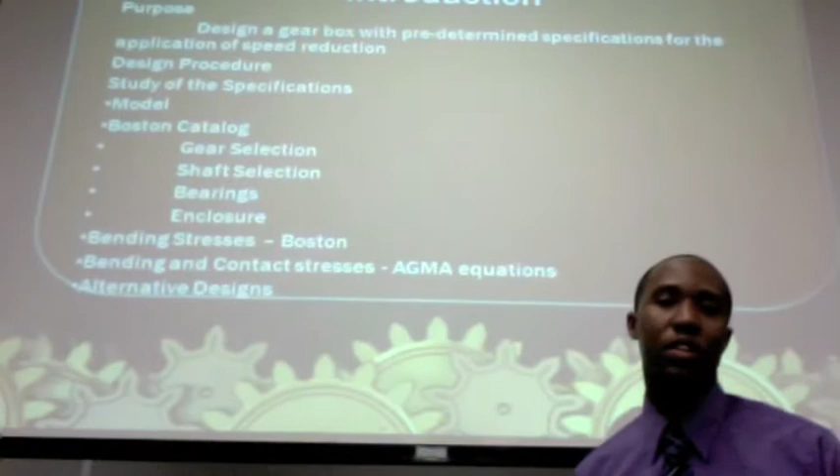Our purpose was to design a gearbox with some predetermined specifications for gear speed reduction. We started off our design procedure by first looking over the specifications, designing a model, then going to the Boston Gear catalog and picking out gears, then designing our shafts, our bearings, then the enclosure. We did bending stress in the Boston catalog and compared it to the AGMA equations, and then after that we went over alternative designs.

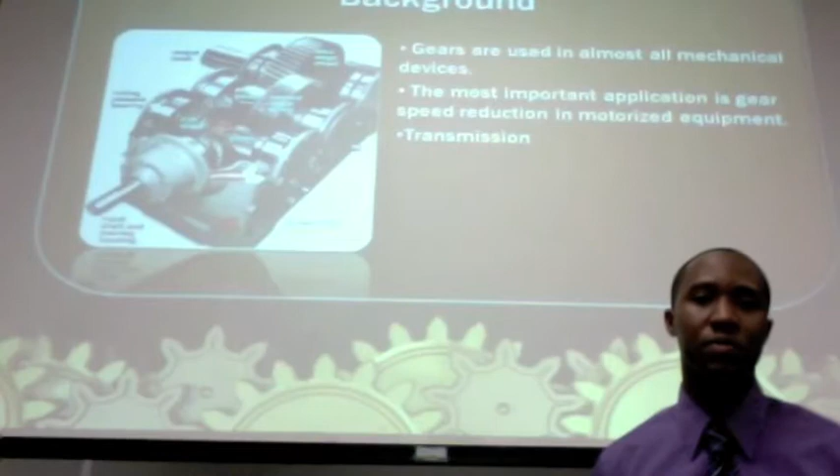Gears are used mostly on transmissions and are used for reducing the speed and also increasing the torque.

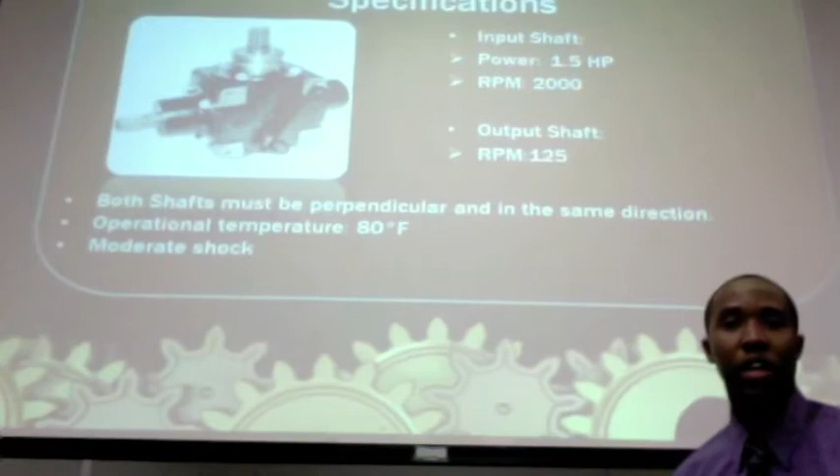The specifications for our project were to have the input shaft at 1.5 horsepower, 2,000 RPM, and the output at 125 RPM. Also, the shafts had to be perpendicular and rotate in the same direction. Our operating temperature was 80 degrees Fahrenheit and had moderate shock.

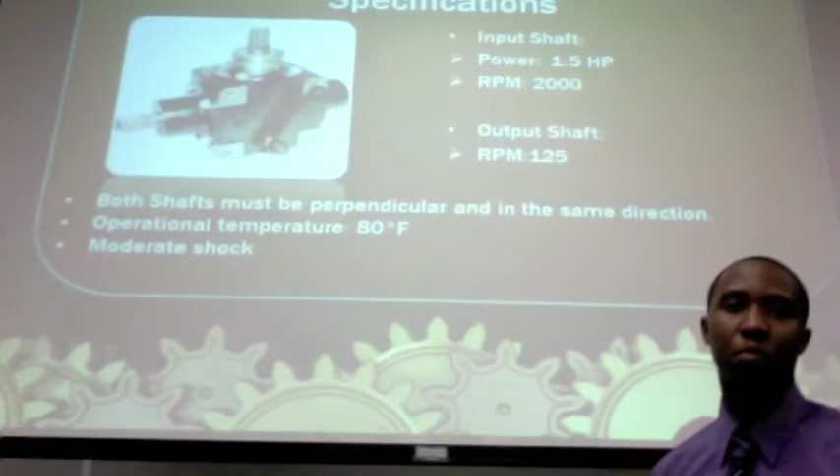Now I'm going to pass it on to Corey, where he will talk about the gear design.

I'm going to talk to you guys a little bit about our gear design and how we started to develop our transmission. So we started off with the gears itself. One of our main factors within our design was we had to have perpendicular input and output shafts. So by knowing this, we know that we had to have a set of bevel gears in our transmission.

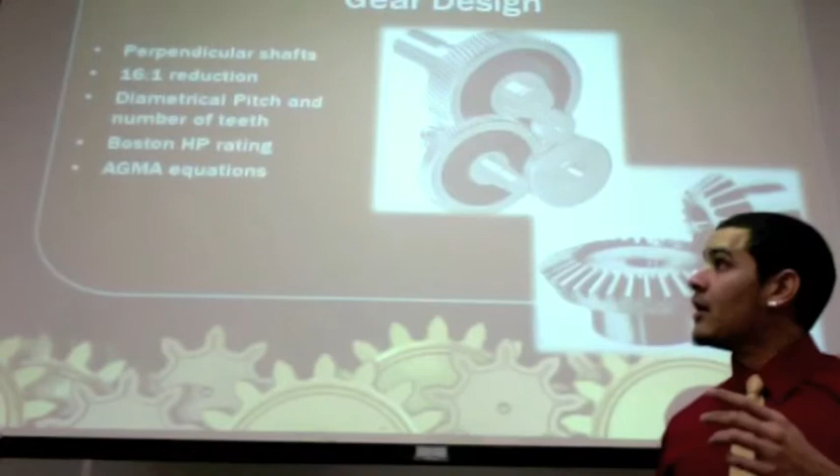By knowing that, we figured out our overall reduction of 16:1 and decided to start with a simple transmission of 2 sets of gears. So each stage would have a 4:1 reduction, giving us our overall of 16:1 reduction.

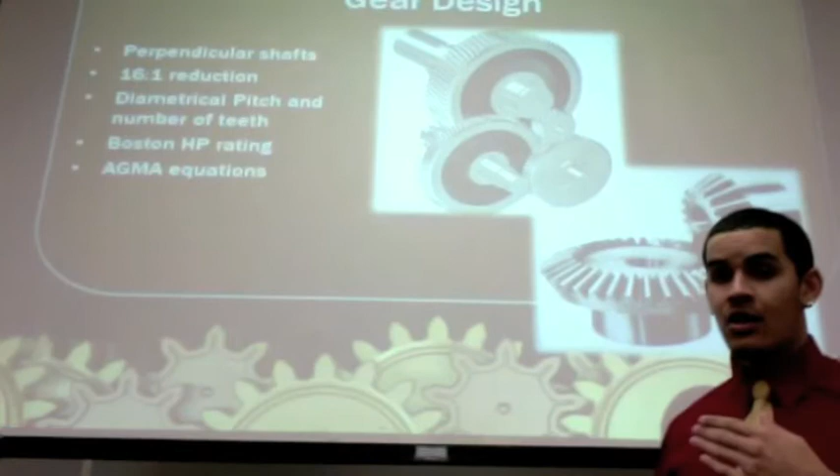From here, we figured out our geometry and how we're going to lay out our transmission. And from here, we could figure out a diametrical pitch, number of teeth. And once we had all those numbers, we could then go to the catalogs and pick our specific gears.

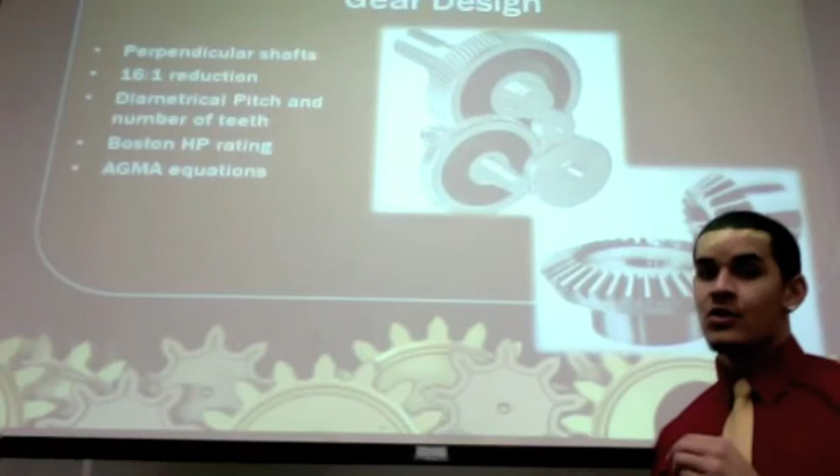So we decided to use the Boston Gear catalog. And from here, we chose specific gears that would give us the ratios we needed. Once we had those gears picked, we tested them based on the horsepower ratings that Boston specified. And once we had those done, we compared it to the AGMA equations, and in turn, they turned out to be within our limits.

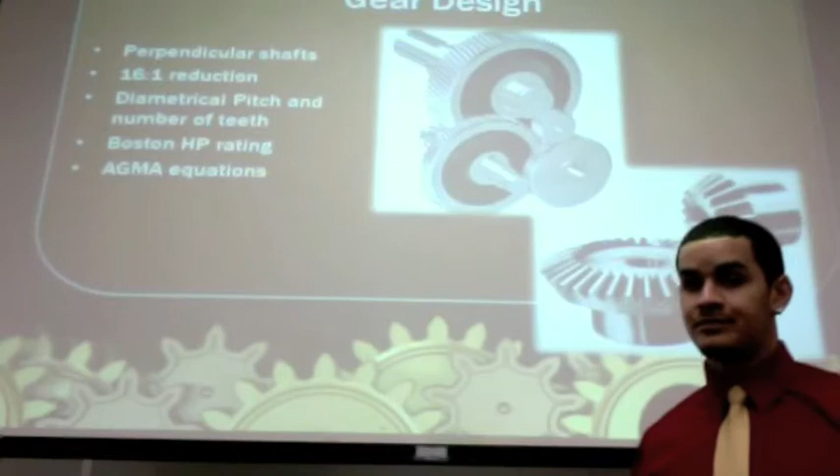From here, we went on to our shaft design. Picking our shafts, we had a fixed diameter because the diameter of the gears itself was fixed, so the only main variable we had for our shafts was the material. We decided to start off with a very hard steel, which was we actually ended up using stainless steel, 303 stainless steel. And from here, we did a stress analysis on the shafts based on the Goodman criteria.

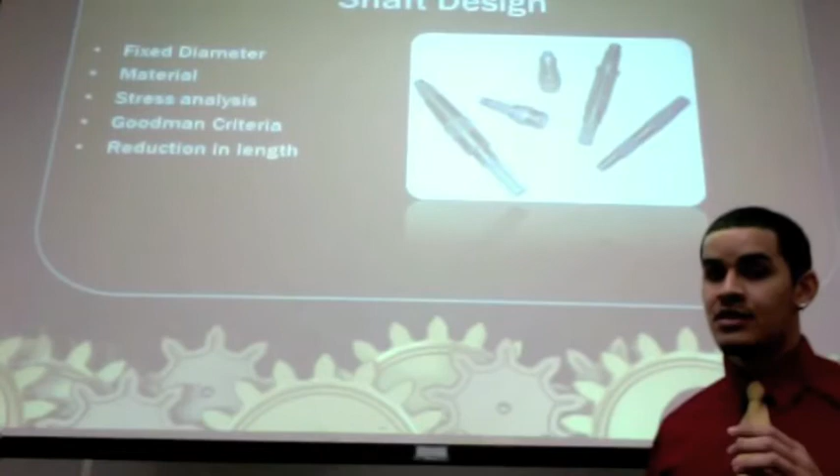After doing this, we realized that during our design process, we could have actually done a reduction in length in some of our shafts, which would actually increase our factor of safety due to smaller moments and torques.

So once we had our shafts and gears done, it was time for the bearings. To pick our bearings, once again, these are based on the fixed diameter of the shafts, so we had to find a bearing that would fit amongst these shafts.

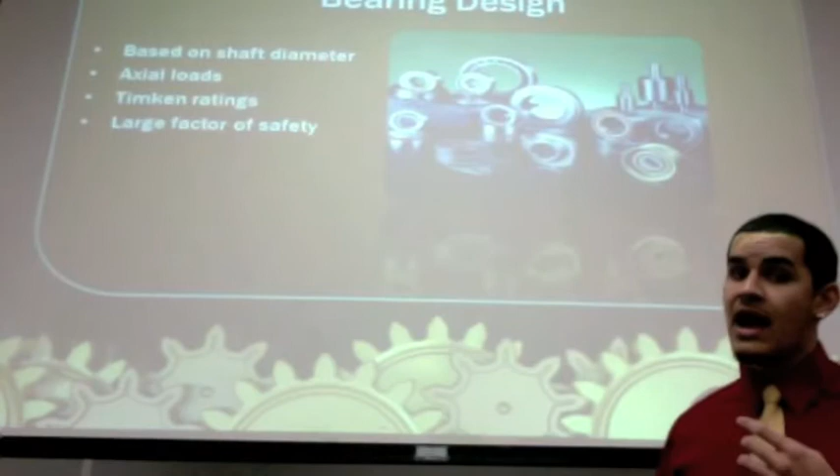So we consulted the Timken catalog, and once we found our specific bearings we needed, we tested them based on their equations, and we actually found that we had a very large factor of safety within our bearings. Even though we had some axial loads, because of the bevel gears, they weren't significant enough for us to have to use tapered bearings.

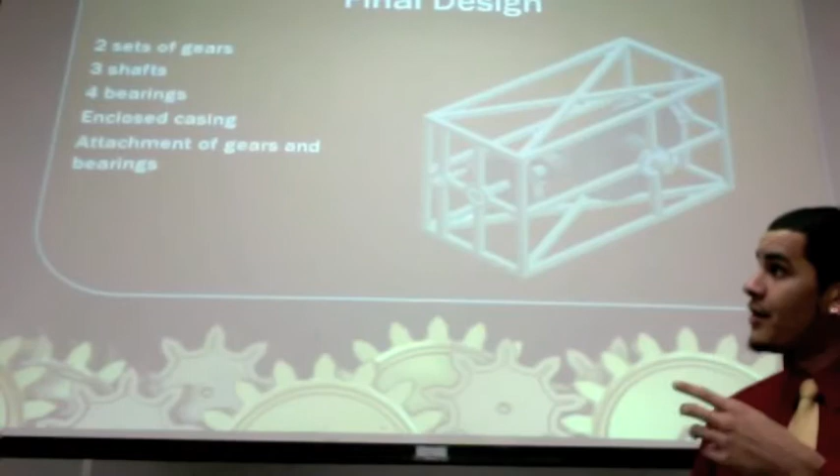So from here, we got our final design, which was based on 2 sets of gears. We had a set of bevel gears, a set of spur gears, and from here we had 3 shafts. Once we had our shafts picked, we figured out we needed 4 bearings, and we figured out that we could have actually made a complete casing around the gears, which would act as support and protection for the system, because one of our factors was high humidity levels.

So by keeping that in mind, we have a sheet metal that enclosed the whole casing in order to get us a fully closed casing so that we wouldn't have to deal with the humidity levels.

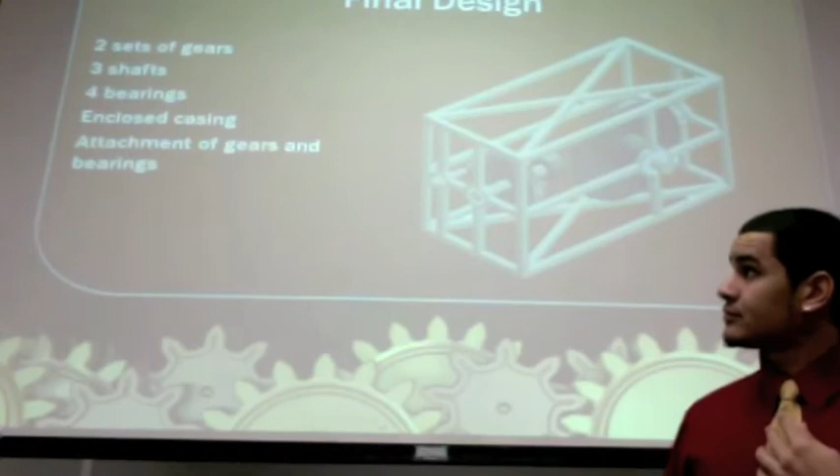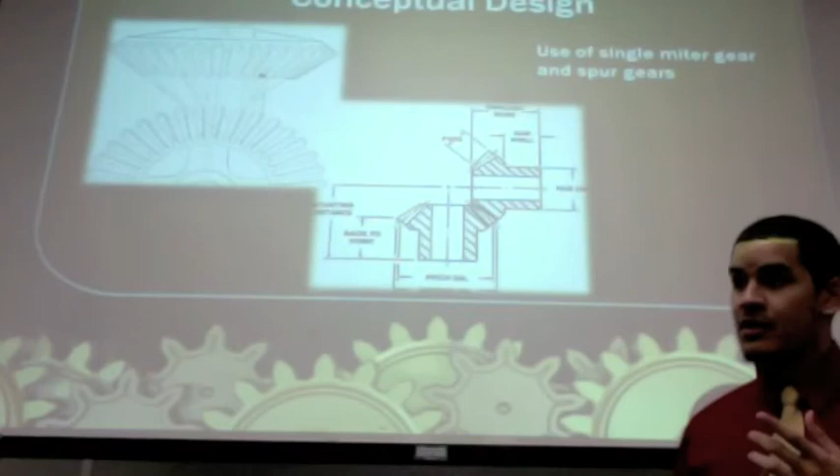During the process of designing our gearbox, we realized that there were a number of different routes we could have taken, one of them being that we could have used a single miter gear, which is a 1-to-1 ratio of bevel gears, to achieve our perpendicular design that we needed, along with a numerous amount of spur gears that we could have chosen. It could have been 5 sets of spur gears, 8 sets of spur gears, however much we wanted. But we decided to go the route of just 2 sets of gears and a 2-stage reduction gearbox.

Hi, my name is Christopher, and I'm going to be talking about the cost estimate and summarizing our results from the presentation. As Corey mentioned before, we had chosen the correct gears, bearings, shafts, and enclosure in order to properly enclose our gearbox design.

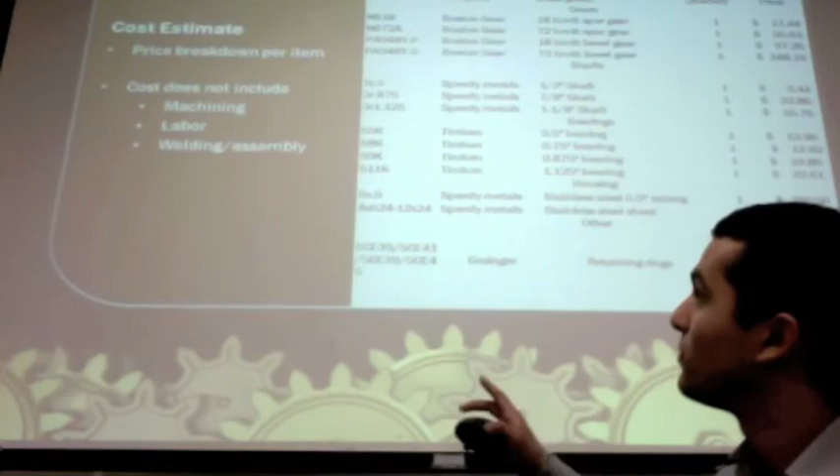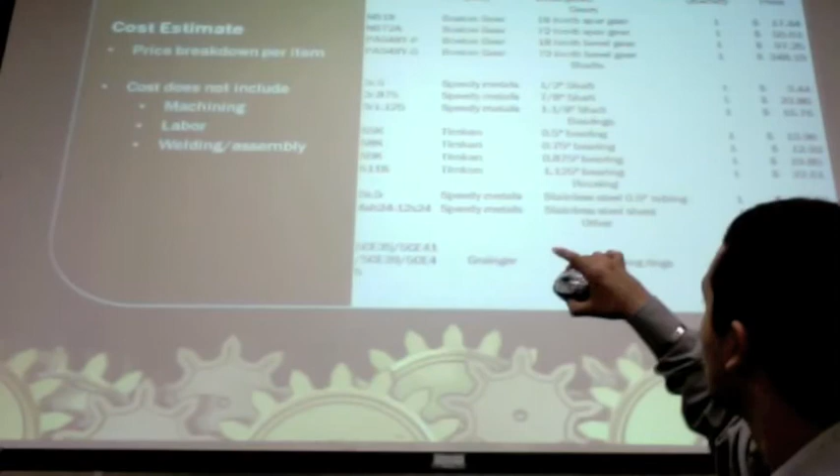As you can see here, there's a breakdown of our products per unit of the quantity. We have the gears and bevel gears. The bevel gears are slightly more expensive than the spur. We also have the shafts and the cost of the bearings, and the price for the material for actually putting the enclosure together.

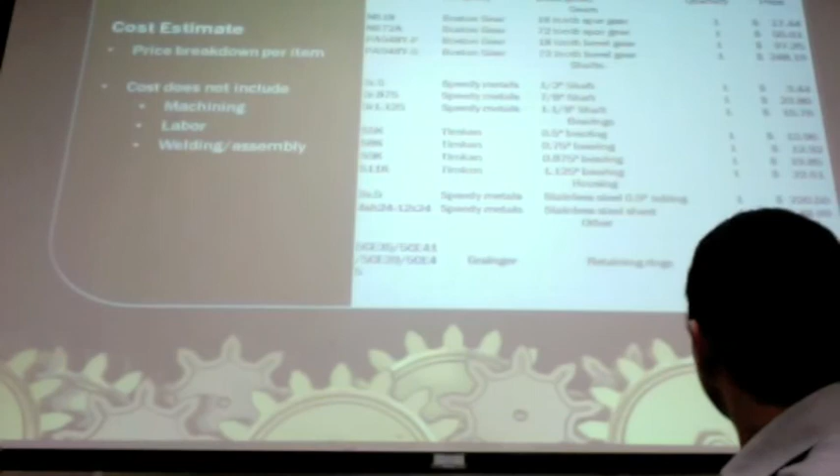It came out to a total of $821.85. The cost does not include any labor, machining, welding, or assembly necessary in order to actually put the enclosure together. This is strictly material costs.

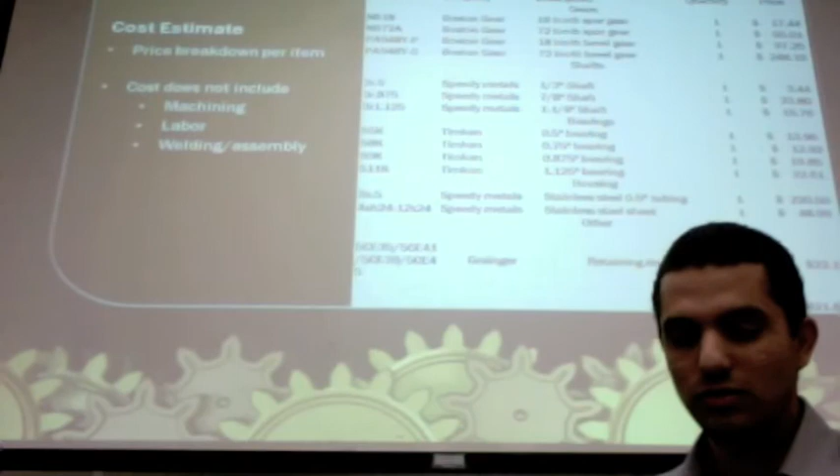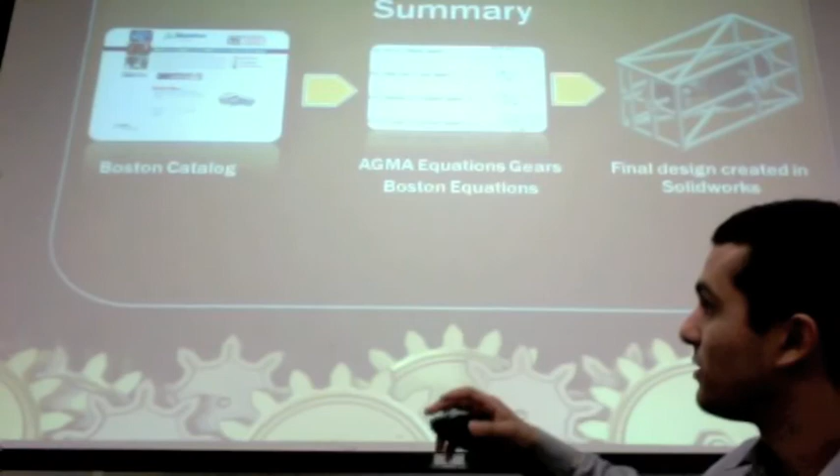As Corey and Stephane have actually said, we started out with looking at specifications and finding out what the necessary teeth and ratios were between the gears in order to establish the correct Boston gears and shafts.

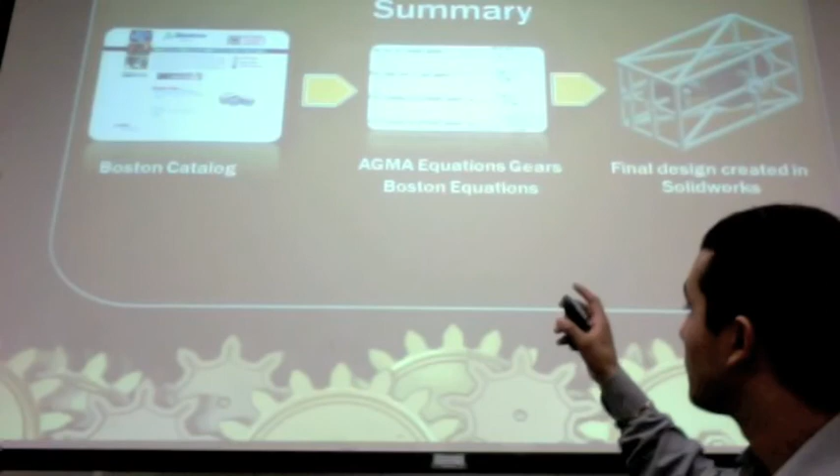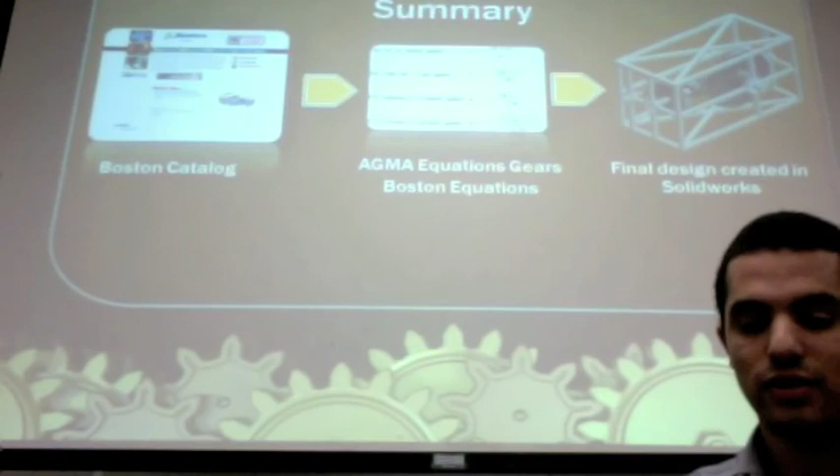After choosing out the correct gears, we used AGMA equations in order to find out the bending and contact stresses in both the Boston equations and the AGMA equations. And then finally, we put them in SolidWorks in order to look at the actual design without actually creating any of the gears, and look at the mechanism of how it's created.

And now we're going to show you a video of the actual gearbox design in motion.